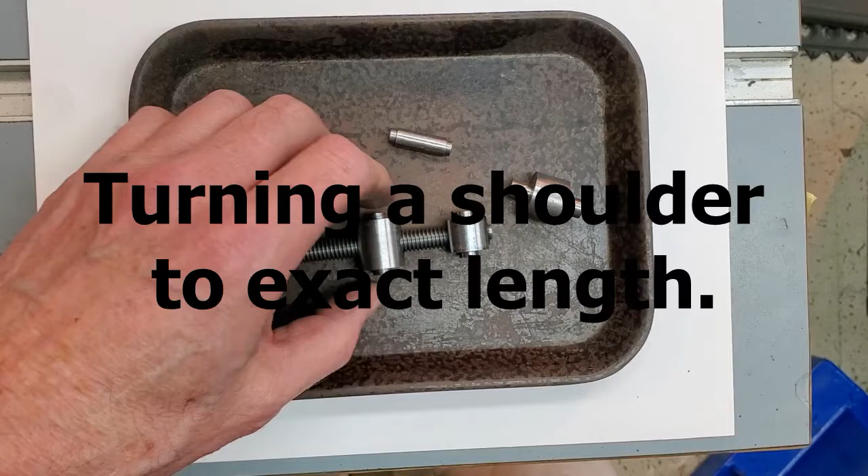Today I'd like to talk about turning shoulders on small parts.

Here are some examples of shouldered parts used in the machinist clamp kits: a spacer pin, hinge pin, bearing pin, and threaded pin. These are all parts that you will create if you order the machinist clamp kit.

Here is a prototype of a clamp created from the kit. This is a prototype, still being refined, but very close.

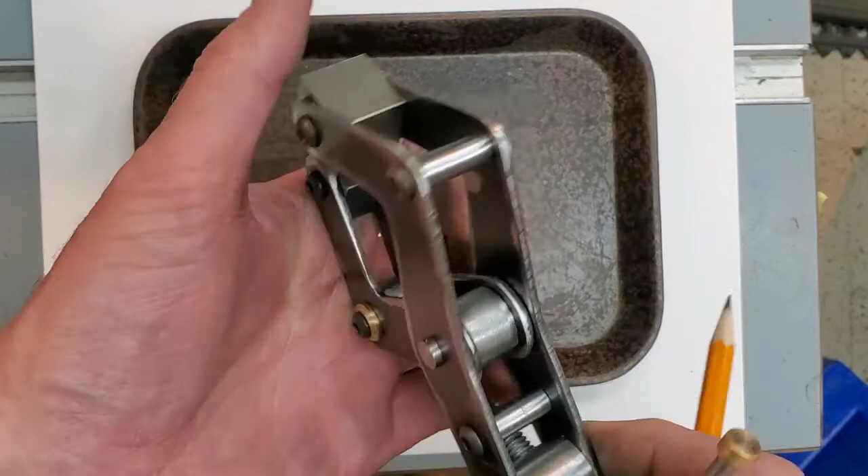There's our hinge pin. You can see the reason for the shoulder - the smaller diameter rides on the outer plates. Here's a spacer pin.

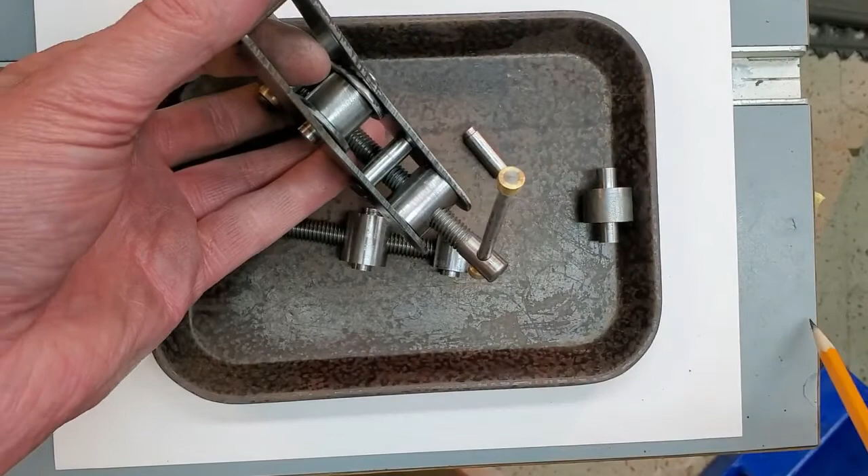And here is the bearing and threaded pins. There's an example of where the shouldered parts are used.

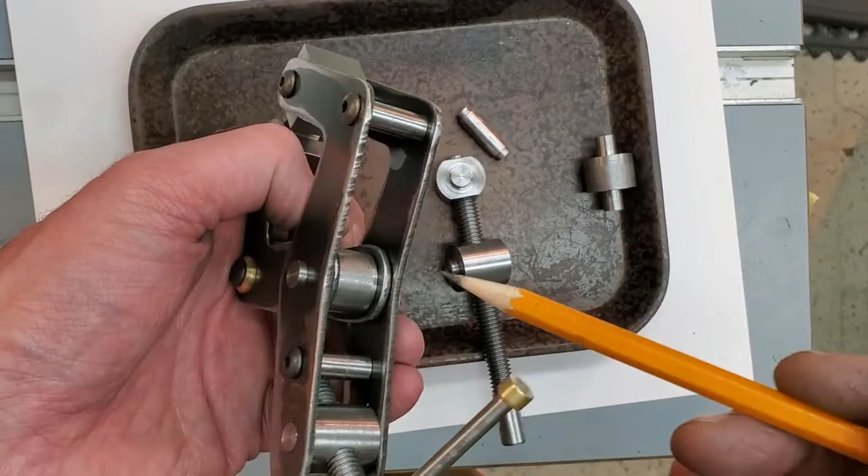For our demo today, we will create one of the hinge pins. Let's have a look at the drawing.

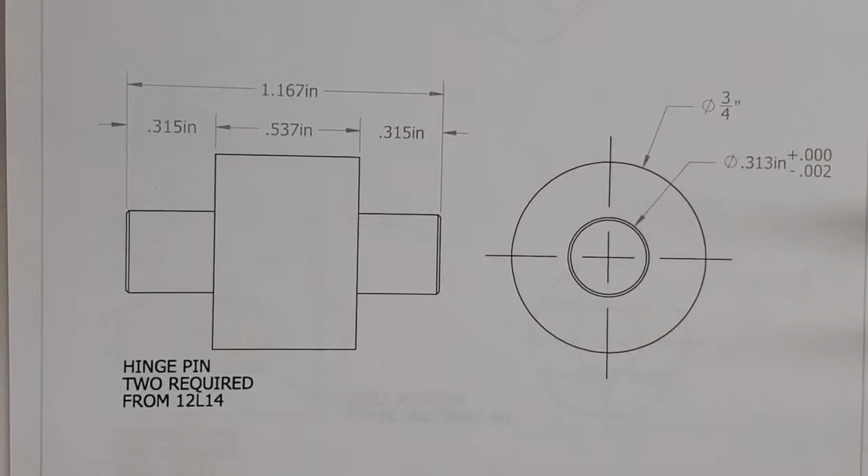Okay, here's the drawing of the hinge pin. As you can see, the two shoulders are 0.315 inches long. Our stock is 3/4 inch diameter, and the reduced diameter here is 0.313.

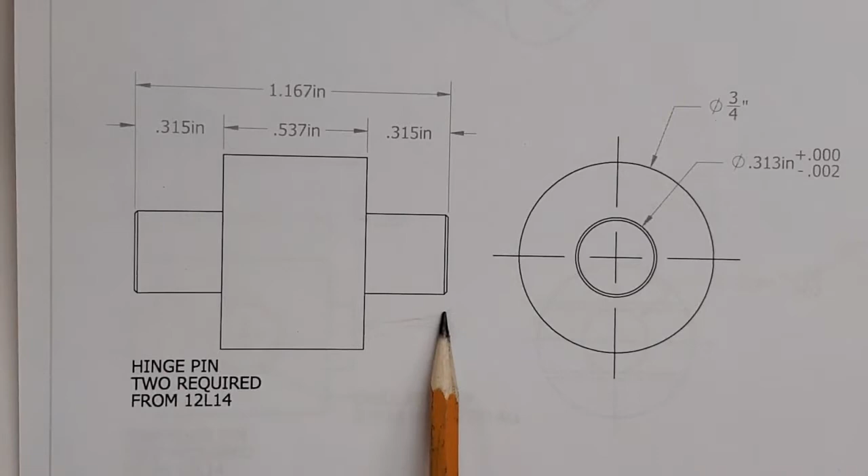Today we want to focus on how to get this exact length, 0.315. We'll see how close we can get to 0.315 of an inch - that's 8 millimeters.

First thing we'll do on the lathe is turn our stock to exact length, 1.167.

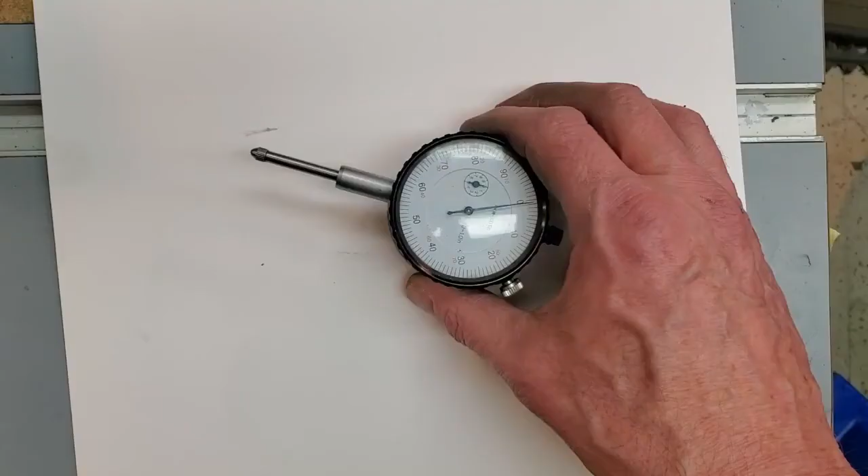One of the tools we'll be using today is the dial indicator with a magnetic back. You can place this on the ways of the lathe and measure the exact travel of the carriage.

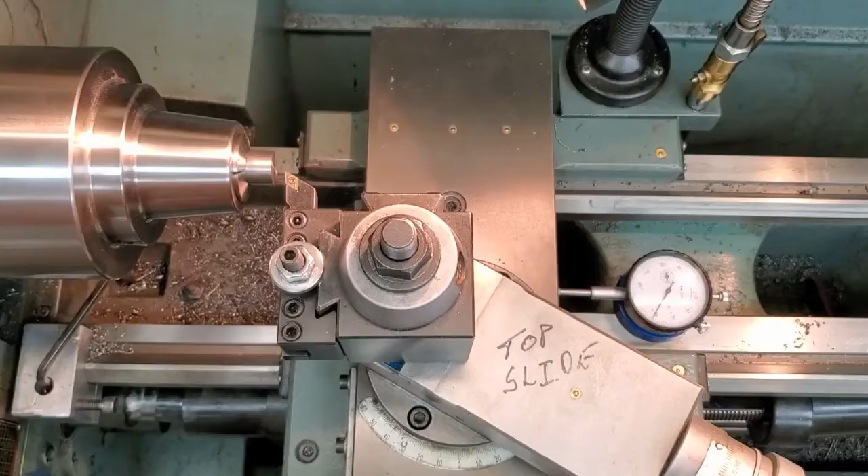Let's go over to the lathe. I'll show you some more. Okay, here we are at the lathe. We have our magnetic back indicator on the ways. We have our carriage stop.

Another important tool for our demo. What I'm going to do is just snug up the carriage stop. It's still able to move, but it's snug on the ways.

So we're going to bring the cutting tool against the stock. We're going to slide in our dial indicator and zero it.

I'm going to retract the tool and move the carriage our 0.315. 1, 2, 3... 1 past... 1, 5.

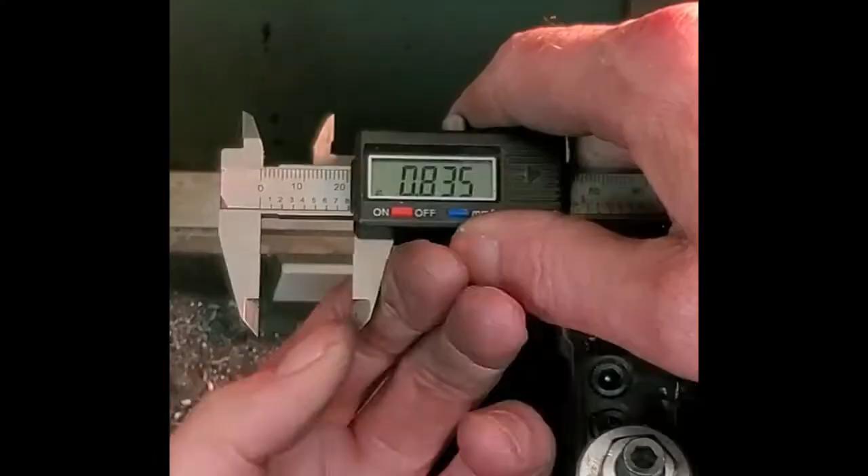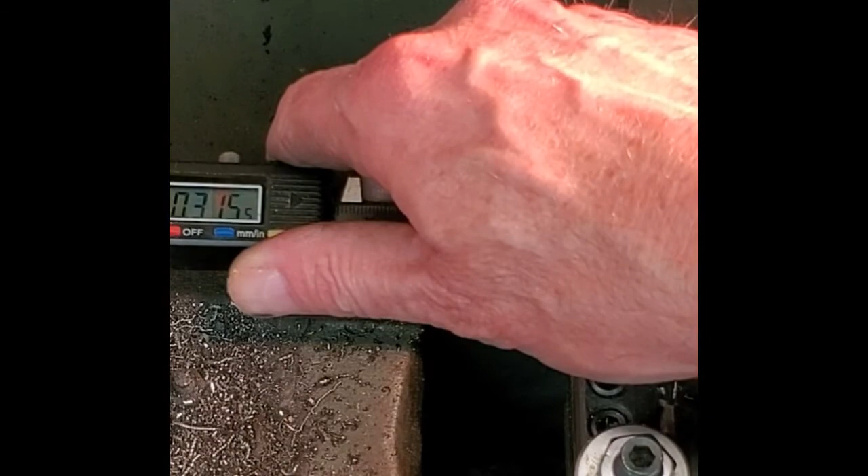Let's see how we did lengthwise. We were shooting for 0.315. Got my dinky calipers. Gotta like it - there you have it, exact depth

of a shoulder. There we have it.

12L14 steel - just a pleasure to work with. Excellent surface finish. The video makes it look much worse than it really is.